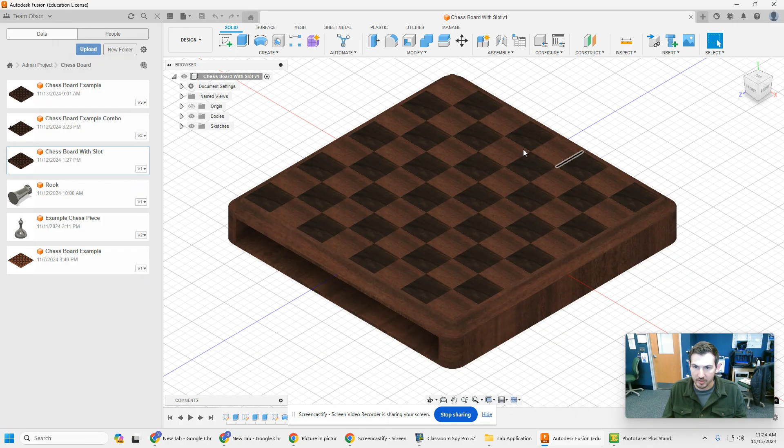So as you look at the chessboard, it's all ready except for the drawer itself. I actually created a little indent here, about 8.5 from here to about midway in. So we're going to create a little drawer in there.

To do that, we're actually going to create a new component within the file you're working in right now. So I'm going to click on New Component, and it's going to create a new component, and we are selecting the parent. It's already selected, so I don't have to do anything else with it. I just need to hit OK.

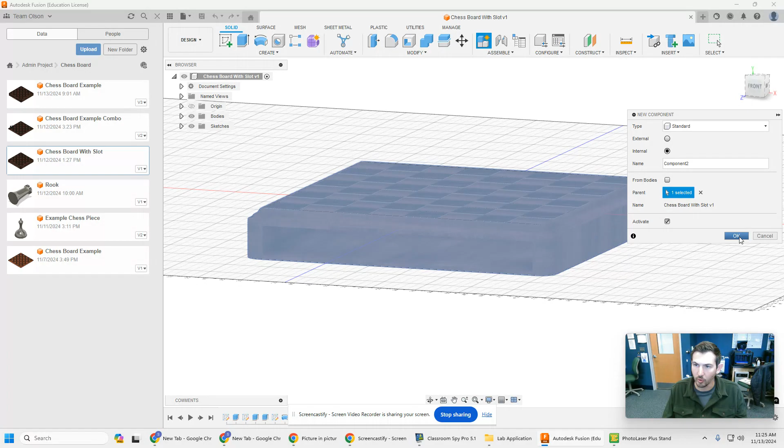When that happens, notice my component is created, and this little dot appears, which means that component is activated. Now if you mouse over the chessboard, you notice this is not activated anymore, so we're working on the new component while we can still see the chessboard in the background here.

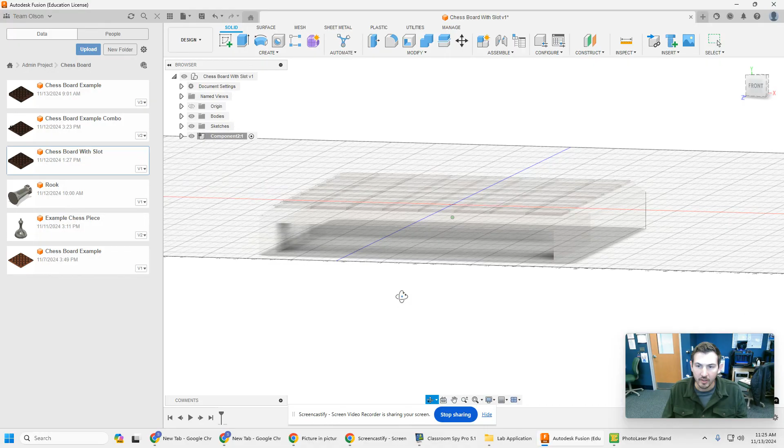So what I'm going to do is start by creating a sketch on the front of the board here. It's really hard to see, so I'm going to change my style really quick here—maybe do the dark gray so you can see the front of the board is located right here.

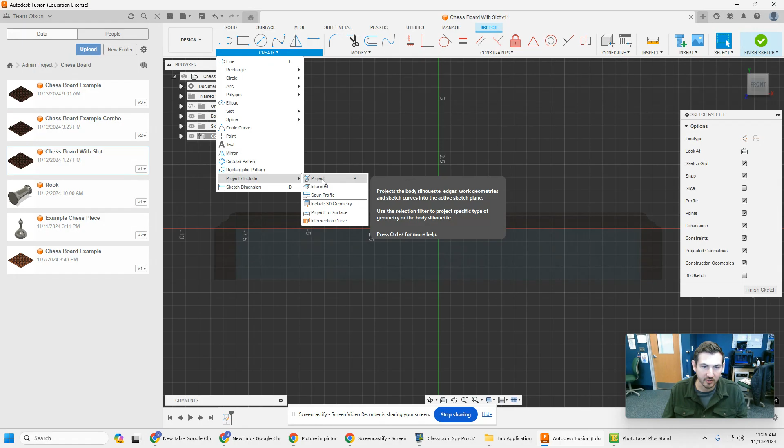We're going to go ahead and sketch on that front of the board. I'm going to sketch right here and just use that board to create the correct size drawer. So instead of creating a rectangle, I'm just going to project the lines that already exist. I'll go to Create, Project and Include, and project these inner lines that I'm going to end up using to create the drawer itself.

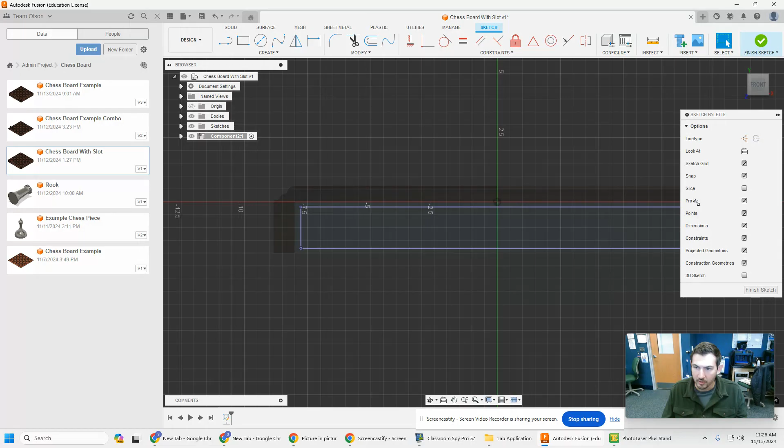So there I have those lines included. You can now see when I finish that—oh, I missed one there—so I'm going to go back into my sketch, which is right here. I missed that because I was over too far, so I just want to make sure I'm including that as well. There we go, now I have all the lines I need.

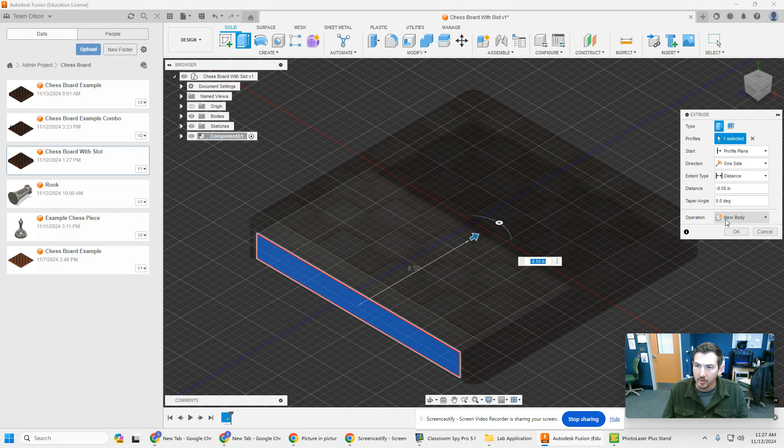Now I'm going to go ahead and extrude it back to the length that I need—about 8.5. There you go. You can see it's going all the way back into that part of my chessboard. It is a new body, so I'll hit OK. And now I have that drawer.

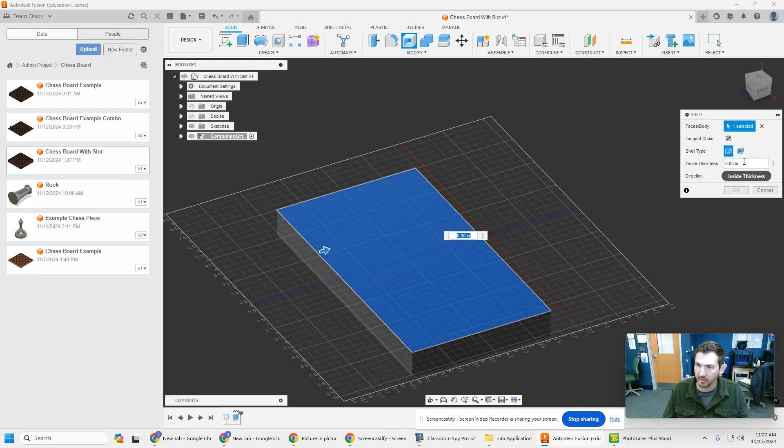One of the things that's going to make it easier to work on this drawer—you see how I'm still selecting the chessboard itself—I can hide those bodies from that component by just clicking on the eyeball over here. Now I'm left with just the drawer I'm creating, so I can go ahead and shell out the drawer itself. Let's just do 1/8 of an inch. Now I have a drawer here where it's going to be able to hold those chess pieces.

Now from here, I'm going to want to join this to the actual chessboard, so I'm going to show everything again. Before I can do any joints, when I created this component, if I right click on component 2 here, I need to make sure I'm ungrounding this from the parent, because that will prevent us from creating the joints the way we want.

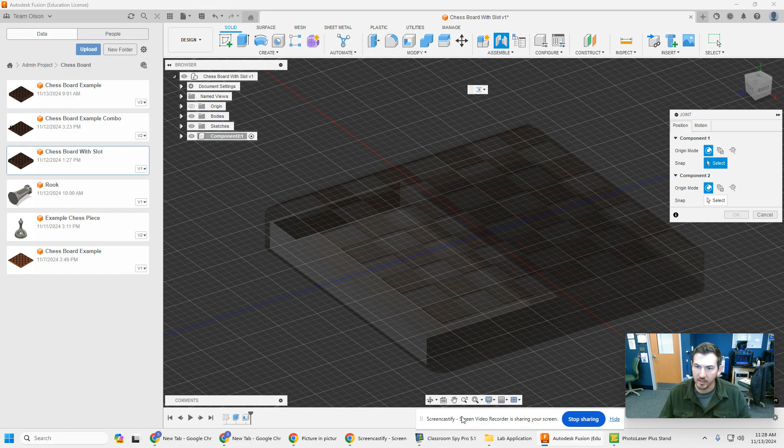So I'm going to go ahead and click on unground from parent. Now it's kind of just freely in space here—it's not grounded to the chessboard anymore. Once I've done that, I'm going to go up to joint and click on that, and start with this new component that I did.

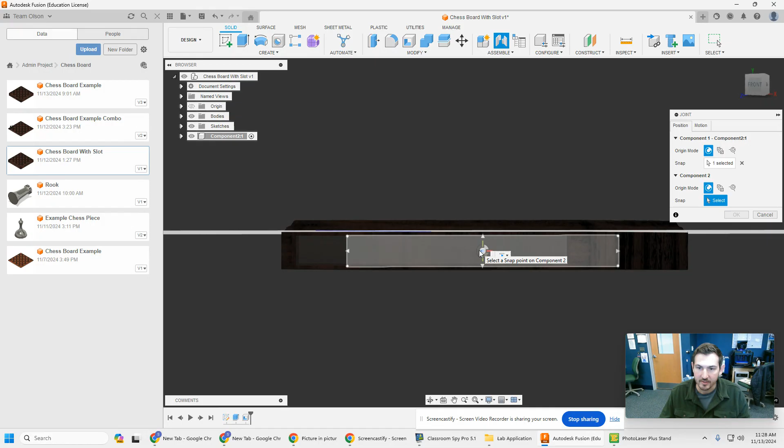I'm going to click on the back. Notice how it's going to lock into that middle. So I'll click right there. Now it's going to show me my chessboard. What I want to do is click in the back of my chessboard, or that back of the slot right there. So when I click, it's going to attach that. If I look in 3D, you can see how it was moving there for a second. Now it's going to lock that into place.

One of the things you can do on top of it is actually control the motion of that drawer. What we're going to want to choose, it's going to default to rigid, but we want slider. There's a bunch of different options here. Slider, when you watch it, is going to go in and out. You can preview the motion right there. There are a lot of other ones you can play around with for different purposes.

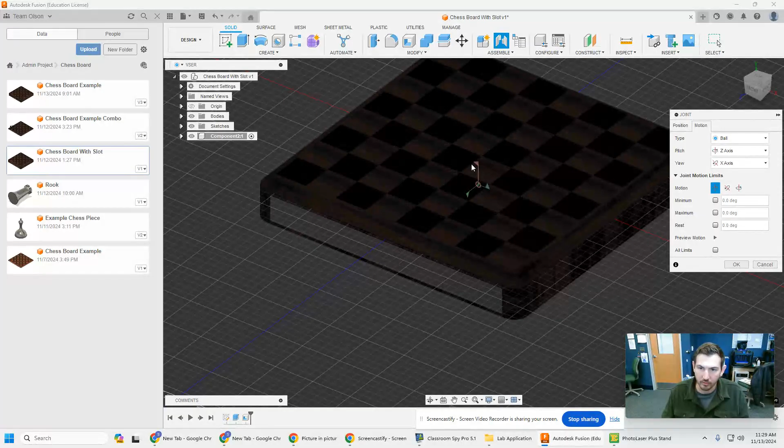They're all located here, like a ball and joint, which gives you motion on all three axes, or you can modify that. There's also revolute, which if I were to create a chessboard that folds in half, you could do something like that. So depending on what you want to do and how you want the motion to move, you're going to pick whatever one's relevant for you.

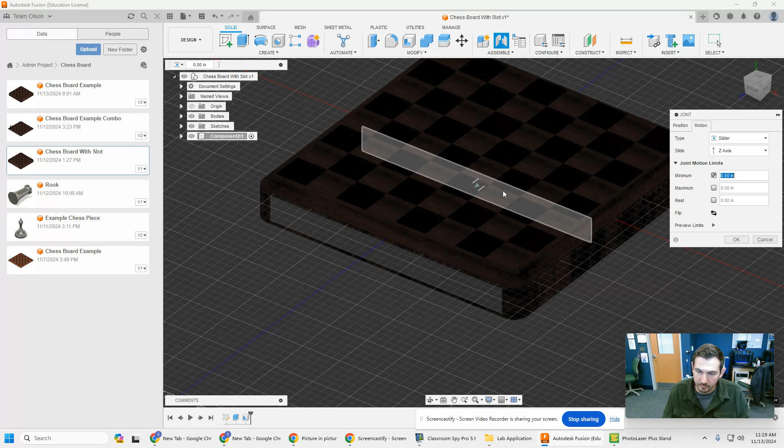For us, slider makes sense because we want it to slide in and out of this space here. Now I'm going to select the minimum. 0 is going to be where I joined it in the back, so that's 0. My maximum, if I want it to come all the way out, that'd be 8.5, just because that was the depth of the actual drawer space.

And then my rest, if I click that, it's going to make it so it always stays at 0. After I pull it out, it'll go back in. I'm going to leave that unchecked because you'll see that when I remove it, you get this motion, but it's not going to just lock back into the 0. If you want it to lock back into the 0, you just need to check this box.

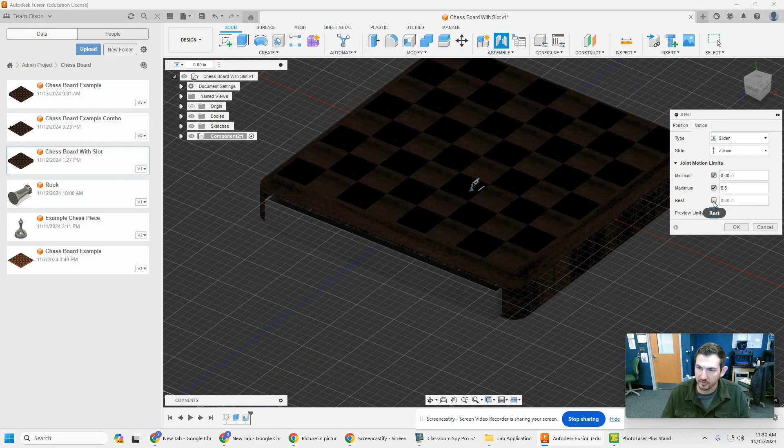So if I just hit OK here, I'm going to change my grid, or my visibility, back to what it was before, and make sure I can see all my components. My bodies are all shown there. So there is my chessboard and the drawer.

Now when I actually pull this out, notice that I can control how far I go, but 8.5 is the furthest, and 0 is the minimum there. If I wanted to change that, I went down here to the bottom, back to my joint, and I could change this and hit the rest at 0, so now when I pull it out, it's going to always click back into that position, because that's the resting position.

That's kind of why I left that blank, or didn't check it, just because I don't want it to snap back in. I can leave it like that if I want, or I can push it back in. So that's like a basic joint there, just showing you how it gives you some maneuverability.

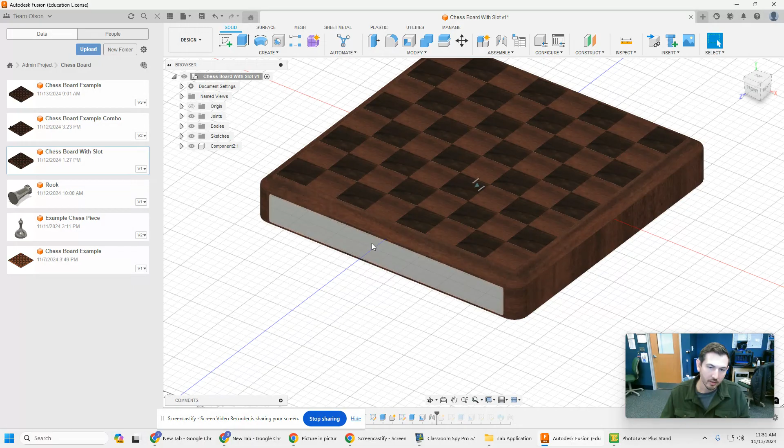I could add a handle here. I would obviously want to change the material here. If I jumped into render, I can go ahead and put that back to like mahogany. We'll make that so it looks the same. And now I have a drawer where it doesn't even look like a drawer, and I can pull it out when I need to put those pieces back in.

Obviously need a handle, something that's going to be able to open it, a knob or something right there. But that's the basics of joints and the drawer in this case. You can play around with the different types of joints, and decide what kind of motion or what kind of drawer makes the most sense for you.